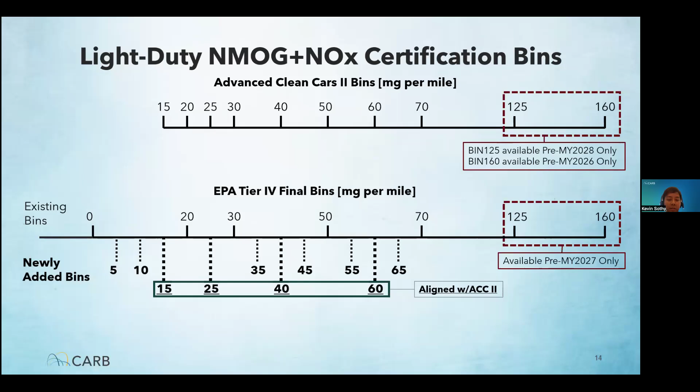ACC2 prioritizes real-world emission robustness, and our current bin structure will reduce variability between in-use emissions and certification values, as repeatability of emissions testing is more assured. Additionally, our current bin structure is more protective regarding OBD detection thresholds. For these reasons, we are not amending the certification bins for light-duty vehicles.

Since we are not making changes to our current Level 4 bin structure, this moves us to our next topic regarding the cleaner CARB provision. As we explained in the previous slide, EPA's Tier 4 light-duty program will have more certification bins than CARB's Level 4 light-duty program. On this slide, we will go over the complications the addition of these new bins creates with the cleaner CARB provision, which CARB is proposing to eliminate as part of these amendments.

For those not aware, the cleaner CARB provision prohibits manufacturers from certifying vehicles in California at a dirtier emission bin than they certify under EPA. For example, if a vehicle certifies to 35 milligrams per mile for EPA, under the cleaner CARB provision, the same vehicle must certify in California to 35 milligrams per mile or lower.

Since we are not changing the current Level 4 bin structure—sorry, I will speak slower for the translation—since we are not changing the current Level 4 bin structure, this means California will not offer a bin at 35 milligrams per mile, and manufacturers cannot certify to 40 milligrams per mile in California under this provision.

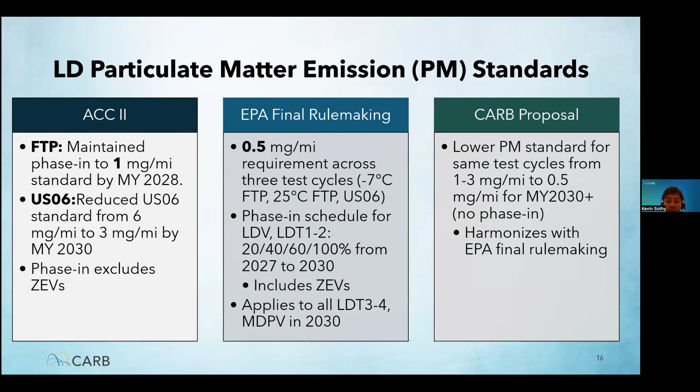CARB proposes to harmonize with EPA light-duty PM standards and lower our standard for all test cycles to 0.5 milligrams per mile for model year 2030 and beyond. As EPA standards will be fully phased in at this time, there will not be a phase-in for California standards. This concludes our topics for light-duty vehicle standards.

We are now moving to the next part of our criteria pollutant standards, which are on medium-duty chassis certified medium-duty vehicles. Similar to light-duty, manufacturers are required to meet a fleet average standard for their medium-duty vehicle fleet for each model year. On this slide, we will go over the medium-duty vehicle, or MDV, NMOG plus NOx fleet average standards for ACC2 and EPA Tier 4, then our proposed changes.

For ACC2, we adopted lower NMOG plus NOx fleet average standards, reducing the Class 2B standards to 150 milligrams per mile and the Class 3 standards to 175 milligrams per mile by model year 2030. The California standards exclude ZEV sales from being counted in the fleet average.

For EPA's Tier 4 rulemaking, they finalized lower NMOG plus NOx fleet average standards and set a combined standard for Class 2B and 3 medium-duty vehicles. The federal standards would reduce to 75 milligrams per mile by model year 2033, and the federal fleet average allows ZEV sales to be counted. Additionally, under EPA, all medium-duty vehicles that have a gross combined weight rating greater than 22,000 pounds can be chassis certified or engine certified.

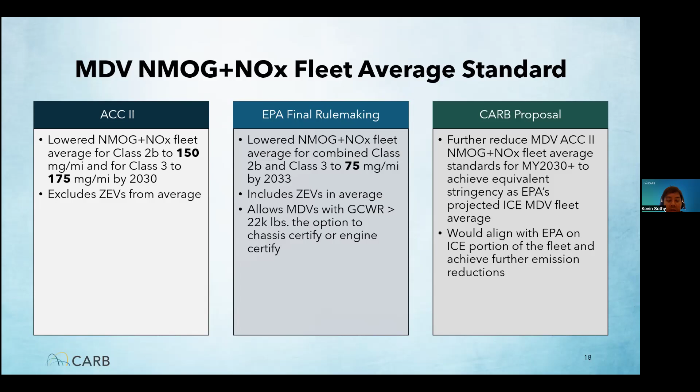On this graph, we will go over our current ACC2 standards and proposed standards for the medium-duty fleet average. The x-axis shows the model year in which the standard applies, and the y-axis shows the NMOG plus NOx emission standard in milligrams per mile. The current ACC2 standards are shown in solid lines for Class 2B and 3 vehicles. The standards reduce from model year 2027 to model year 2030 and remain constant after model year 2030.

We are proposing to replace our current separate standards for model year 2030 with combined standards, as shown here in the dashed lines. The proposed standards would be further reduced in the later model years. The proposed standards will continue to be an ICE-only fleet average for both medium-duty classes, and the standard would reduce from model year 2030 to model year 2032, with the standard at 130 milligrams per mile and remaining constant afterwards. This ensures the California standards are equivalent to EPA standards and achieves further emissions reductions in California.

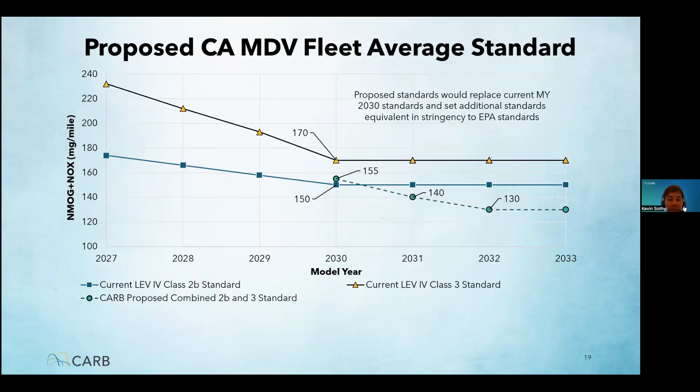We are seeking input on whether model year 2030 should remain as separate or combined standards. Now that we have gone over the medium-duty NMOG plus NOx fleet average standard, we will now go over the medium-duty NMOG plus NOx certification bins, which manufacturers use to comply with the medium-duty fleet average standard.

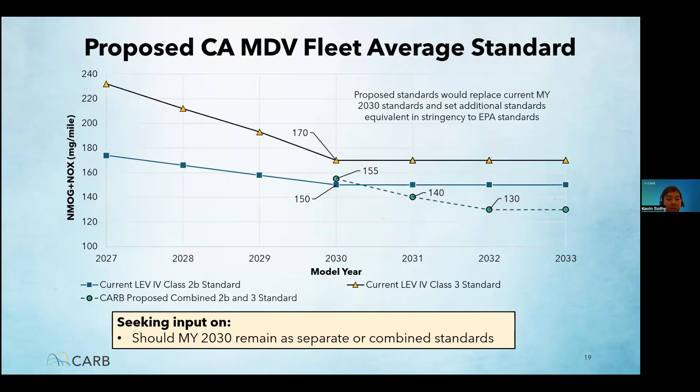On this slide, we will show a comparison of our current ACC2 NMOG plus NOx certification bins and EPA's Tier 4 certification bins. In California, our current ACC2 requirement is shown on the top diagram. We have separate certification bin standards for Class 2B and 3 vehicles. The highest emitting bins, shown by the dashed lines, are only available until model year 2028.

In the bottom diagram is EPA's Tier 4 certification bin standards. The highest emitting bins in EPA's program, shown in dashed lines, are no longer available in Tier 4, and both Class 2B and 3 vehicles have the same certification bin standards. Although EPA offers more bins, both EPA and CARB offer similar bin structure from 75 to 170 milligrams per mile, with EPA offering more bins under 75 milligrams per mile.

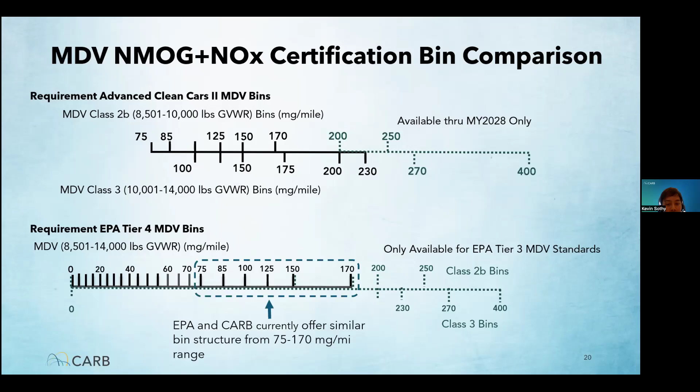Since EPA has a different bin structure from CARB, we are proposing to make changes to better align the two programs, as we will show in the next slide.

On this slide, we will go over proposed medium-duty certification bins that align with EPA, from the bin range of 75 to 170 milligrams per mile for both medium-duty classes. These are all the bins we currently have under ACC2.

Our current regulations phase out the highest emitting bins, ranging from 200 to 400 milligrams per mile, after model year 2028. Our proposal will continue to phase out the remaining higher emitting bins, ranging from 175 to 230 milligrams per mile, after model year 2029.

The proposal will simplify the current bin structure, requiring all medium-duty vehicles to certify to the same bin shown here, from 75 to 170 milligrams per mile for model year 2030 and beyond. This will align with EPA's bin structure and remove the highest emitting bins. We are seeking input on whether CARB should add a bin lower than 75 milligrams per mile.

This concludes our changes to the NMOG plus NOx certification standards for medium-duty vehicles. We will now move to the particulate matter standards for medium-duty.

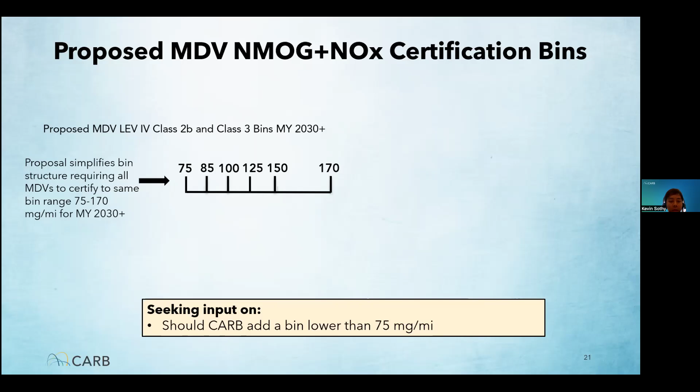This slide will cover our medium-duty vehicle PM standard proposal. Under ACC2, medium-duty vehicles are required to meet a PM standard on the FTP between 8 to 10 milligrams per mile and 5 to 8 milligrams per mile on their aggressive driving cycles. The PM standard varies depending on the medium-duty class and test cycle.

In EPA's Tier 4 rulemaking, they finalized a more stringent PM standard of 0.5 milligrams per mile that phases in from model year 2027 to model year 2031. This standard applies to all medium-duty vehicles on both the FTP and US06 test cycle, as well as for the new cold temperature test.

Since EPA's PM standard is more stringent than California's standard, CARB's proposal is to reduce the current medium-duty vehicle PM standard to 0.5 milligrams per mile for both the FTP and US06 standards, starting model year 2031. EPA's PM standard should be fully phased in by model year 2031, so there will not be a phase-in for CARB. This ensures equivalent stringency to EPA and achieves further PM reductions in California.

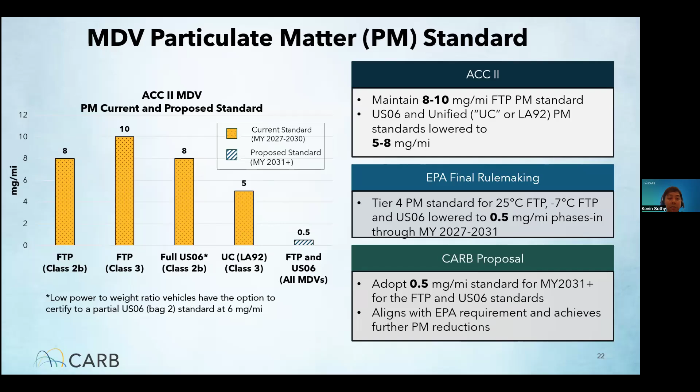We will now shift from the PM standard proposal to a medium-duty test procedure change. This slide will go over CARB's US06 test cycle proposal for medium-duty vehicles.

Current ACC2 regulations require manufacturers to certify to the full US06 test cycle for Class 2B, and allow low power-to-weight ratio Class 2B vehicles the option to certify to a partial US06. Class 3 vehicles have the option to certify to the unified cycle. Both test cycles are high acceleration and high speed tests, with the US06 being the much more aggressive driving cycle. Both test cycles are designed to capture emissions representative of highway driving.

In EPA's Tier 4 program, they finalized a test procedure change that requires the full US06 test cycle requirement for both Class 2B and 3 medium-duty vehicles, that phases in from model year 2027 to model year 2031. EPA eliminated the option for manufacturers to certify to the less stringent partial US06 option for Class 2B and the UC test cycle requirement for Class 3 vehicles.

Since EPA's Tier 4 requirements differ from ACC2, CARB is proposing that all Class 2B and 3 vehicles certify to the US06 test cycle beginning with model year 2030, and allow manufacturers the option to certify to this requirement earlier if they choose. This aligns with EPA and simplifies the certification requirement for chassis certified medium-duty vehicles in California.

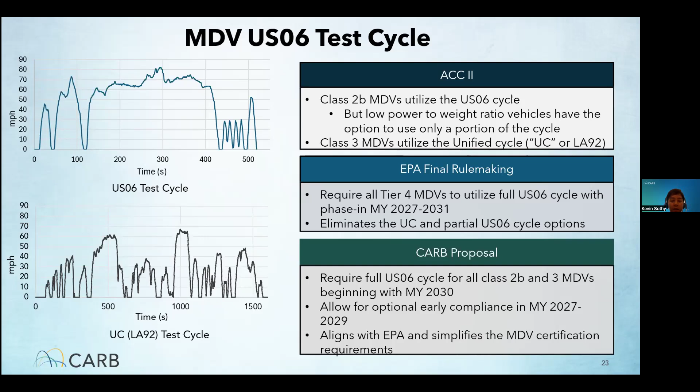Next, we will change topics to the medium-duty optional certification requirement. So this is on medium-duty optional engine certification.

Currently, ACC2 requires all medium-duty vehicles in Class 2B to chassis certify, and allows Class 3 diesel and incomplete gasoline vehicles the option to certify to the heavy-duty engine standards for criteria emissions.

Under EPA's Tier 4 rulemaking, they finalized modifications to the optional engine certification pathway that differ from ACC2. In EPA's program, medium-duty vehicles that have a combined weight rating greater than 22,000 pounds have the option to engine certify for criteria emissions. This allows all Class 2B and 3 medium-duty vehicles with a high combined weight rating the option to engine certify if they choose, which differs from the California program.

Although CARB and EPA's optional engine certification pathways will differ slightly, CARB is not proposing any changes to the current ACC2 regulations regarding optional engine certification, which applies only to Class 3 diesel and incomplete gasoline vehicles. Under both programs, manufacturers have the option to certify to a single certification pathway.

We will now move to the last topic for medium duty, which is about the medium duty in-use standard.

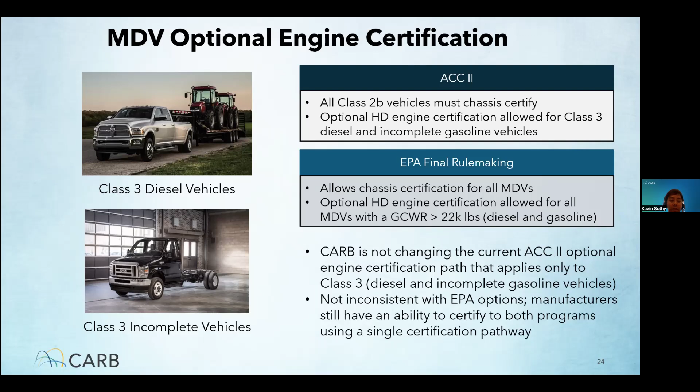On this slide, we will go over the medium duty moving average window in use standard, also known as the MAW in use standard. Current ACC2 regulations require chassis certified medium duty vehicles with a combined weight rating greater than 14,000 pounds to meet the MAW in use standards.

This requires manufacturers to perform PEMS emissions testing on road. Diesel vehicles under the MAW in use requirement must meet a 3-bin MAW standard, and gasoline vehicles must meet a 1-bin MAW standard starting model year 2027.

EPA finalized similar in-use requirements for Tier 4. In EPA's program, all chassis certified medium-duty vehicles with a combined weight rating greater than 22,000 pounds are required to comply with the MAW in use standard, similar to California. But EPA standards allow diesel vehicles the option to comply with either a 3-bin MAW standard or a 2-bin MAW standard, and EPA standards start model year 2031.

CARB is proposing to change our diesel standard from a 3-bin MAW standard to a 2-bin MAW standard starting model year 2027. CARB is not changing the 1-bin MAW standard for gasoline vehicles or the combined weight rating requirement currently established by ACC2. This will align our regulations with the upcoming proposed amendments to the heavy-duty omnibus standards.

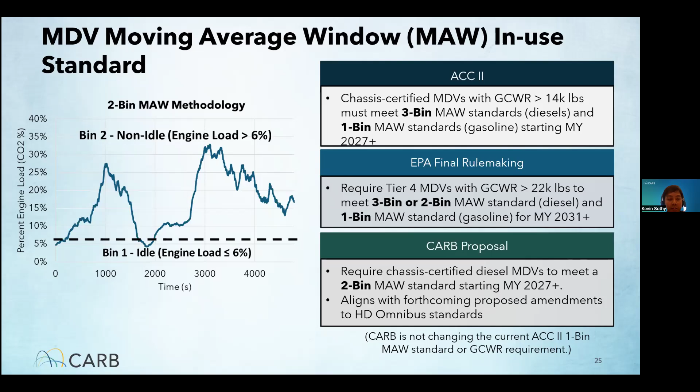This concludes the last topic for medium-duty exhaust emissions. We will now turn to the final topic on criteria pollutant standards, which is evaporative emissions standards.

EPA expanded an existing requirement for onboard refueling vapor recovery, also called ORVR, which involves capturing refueling emissions. The ORVR requirement was extended to remaining vehicle classes previously not covered. These newly included vehicle classes are incompletes, a type of vehicle without a truck bed typically sold to a vehicle upfitter, who then customizes the vehicle.

EPA's Clean Trucks plan added this requirement for heavy-duty incompletes by model year 2027, and their recent Tier 4 rule extended it to medium-duty incompletes by model year 2030. Our proposal is to align with EPA to apply ORVR for all incompletes starting model year 2030 to encompass EPA's 2 separate phase-ins. And to harmonize with these phase-ins, we plan to allow early certification so manufacturers can certify the same way in California as they would federally.

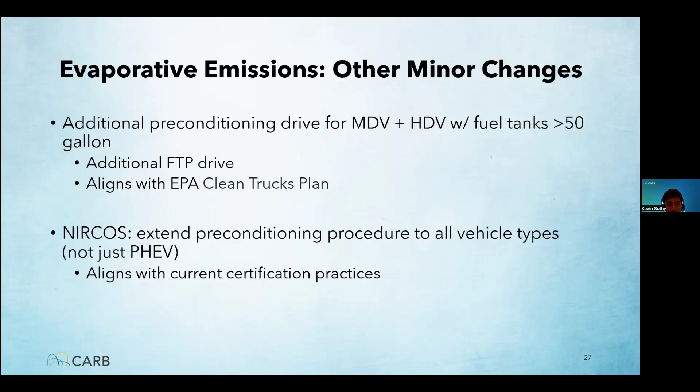We are also working on a variety of other minor cleanup changes in the evaporative emissions and ORVR emission procedures. The next slides for criteria pollutant standards will go over future workshop topics.

One topic that we don't have a proposal for today, but we'll discuss in a future workshop are potential amendments to the LEV IV altitude standards that we adopted back in 2022. We have heard from several manufacturers that meeting these standards on the prescribed timeline for certain test cycles is challenging or creates a substantial test burden. CARB is seeking emissions data and other relevant information specifying why the existing standards cannot be met to inform whether and what type of relief might be warranted.

This concludes our proposals and updates regarding the criteria pollutant standards for the LEV IV program. Next, we will move to the question and answer part for this section with Belinda Chen. Thank you.

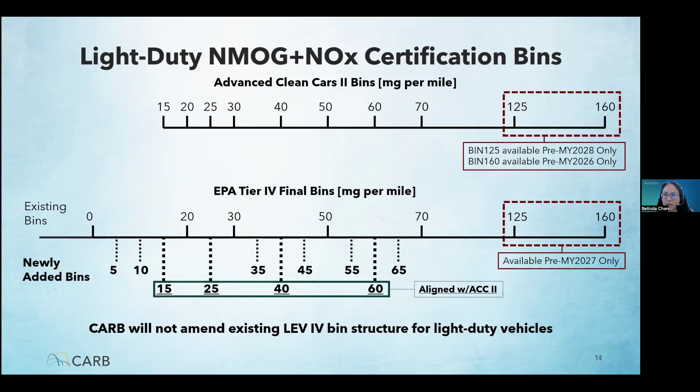All right. What? I don't think so. Sorry, are you talking with me? I don't know if my microphone is still on. Unfortunately, I cannot see it. That's okay, sorry, I was talking to a colleague, but we're definitely still working out some of the details, so I think we'll have to get back to you on this question.

My concern was only about a possibility, for example, that low volume test groups could progressively phase out from a manufacturer fleet while keeping the same value that this low volume test group brings for the customer, while keeping the same fleet average target for the manufacturer and progressively phasing out those cars, basically. Thank you so much.

And then there was a question in the chat about the cleaner car provision for medium duty vehicles. Currently that provision applies to both light duty and medium duty vehicles, and I guess the way we put it in our slide presentation may seem like it only applies to light duty vehicles, but the proposal would be to eliminate it for medium duty as well.

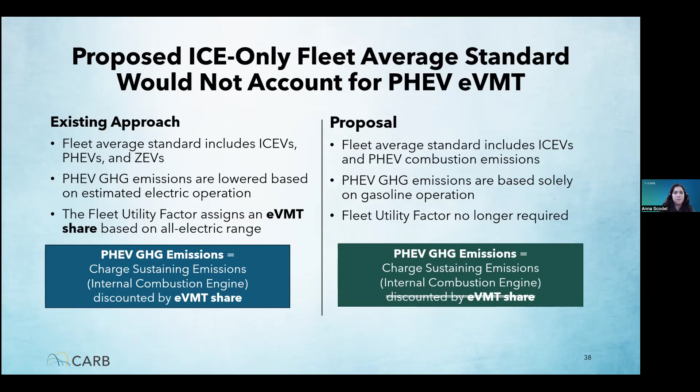As I mentioned, we're developing our greenhouse gas standard that eventually, by 2035, will only apply to plug-in hybrids. So in addition to seeking input on overall stringency, we're also specifically seeking input on future plug-in hybrid charge sustaining emissions rates and what an appropriate stringency might be for those vehicles.

Okay, so I've just covered the main components of our proposal. I'll now talk about a couple other provisions and flexibilities that we are proposing.

First, I want to talk about a concern we've heard from manufacturers about an ICE-only standard: what do we do about internal combustion engine emissions increases that might look like backsliding, but are really the result of a manufacturer having a dwindling number of ICE models as they expand their zero emission offerings?

In thinking through this issue, I want to clarify that our proposal is still to have separate car and truck footprint-based curves. So it's not a matter of whether the last-to-transition vehicles are smaller or larger, cars or trucks. The issue is if the remaining vehicles are biased towards the higher emitting variants above the standard, rather than having a balance of lower and higher emitting variants to meet the fleet average targets.

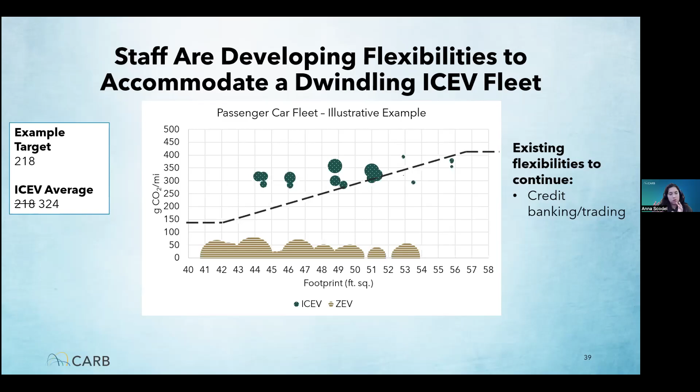Most notably, we're thinking about a mechanism to reward manufacturers that are truly ahead of the game on zero emission vehicles, by allowing them to transfer ZEVs that would have earned excess ZEV value in the ZEV regulation back into their ICE-only GHG fleet average.

So if we take a last look at this example, we see that if the manufacturer is able to count a certain subset of their zero-emission vehicles towards their greenhouse gas requirement, rather than their zero-emission vehicle regulation requirement, they are able to comply with this ICE-only fleet average standard. So this is something we're certainly seeking input on, as well as other ideas on how to ensure that manufacturers can manage a shrinking number of ICE vehicle test groups without sacrificing emissions reductions.

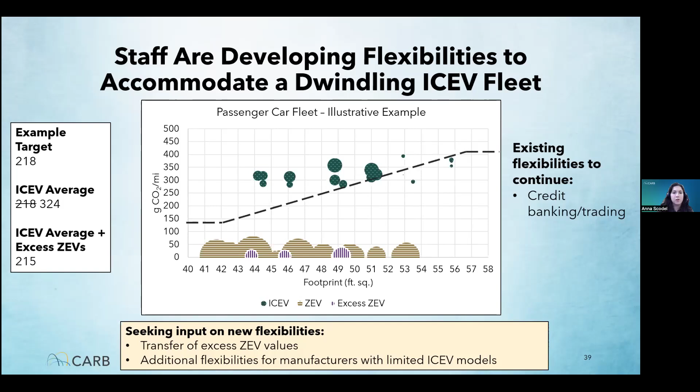Okay, touching now on another topic: the treatment of credit banks from the Advanced Clean Cars 1 program. As I mentioned above, in this proposal we're not talking about requiring manufacturers to newly develop technologies to meet the standards, but we still believe some lead time is appropriate to transition to an ICE-only fleet average. For that reason, we're proposing to update this stringency beginning in the 2030 model year.

We expect manufacturers that remain on track to meet the federal standards will very likely have fleets that would significantly overcomply with our flatline standards, especially as they comply with our ZEV regulation and introduce more zero-emission vehicles. This overcompliance could result in excessive credit banks for a lot of manufacturers heading into the 2030 program, and that makes it harder for us to establish a meaningful standard for California.

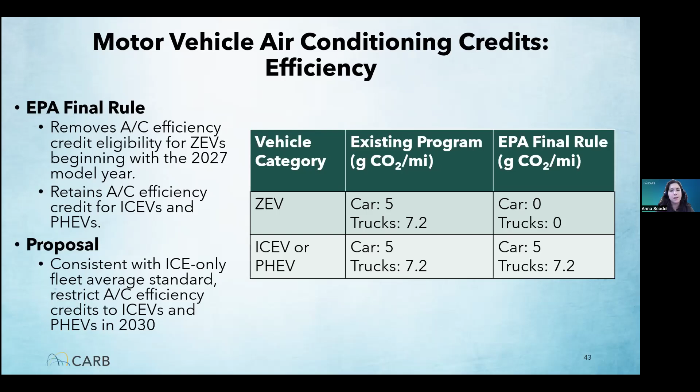Okay, and then the last piece of the proposal here is the definition of medium-duty passenger vehicles. These vehicles are subject to CARB and EPA's light-duty greenhouse gas standards. In their rulemaking, EPA expanded their definition of these vehicles to better capture some passenger vehicles that fall outside the existing definition. These modifications include increasing the weight threshold to include heavier vehicles, increasing the cargo area threshold, and adding a work factor threshold to better define these vehicles.

What this does is include more vehicles than under the current definition, meaning that some vehicles will be pulled out of EPA's medium duty greenhouse gas program and into the more stringent light duty program.

In their rulemaking, EPA stated that one of their goals here was to help address new passenger battery electric vehicles that might be heavy enough to fall outside the current medium-duty passenger vehicle definition, but really are passenger vehicles.

And we agree, and we're proposing to align with this expanded definition in 2030. But I want to mention that because we're proposing to exclude zero-emission vehicles from the light-duty fleet average, we expect the overall impact on the number of vehicles that would be newly subject to these standards to be relatively small.

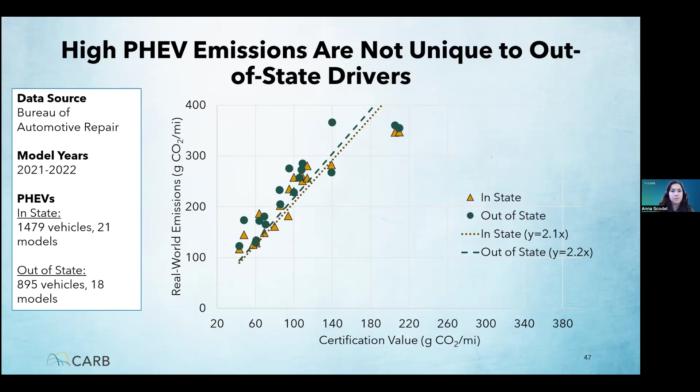One other notion we have heard to help explain these high plug-in hybrid emissions is that maybe the people who buy plug-in hybrids in California are doing so just to gain access to high occupancy vehicle or carpool lanes, and maybe they aren't really motivated to charge their cars.

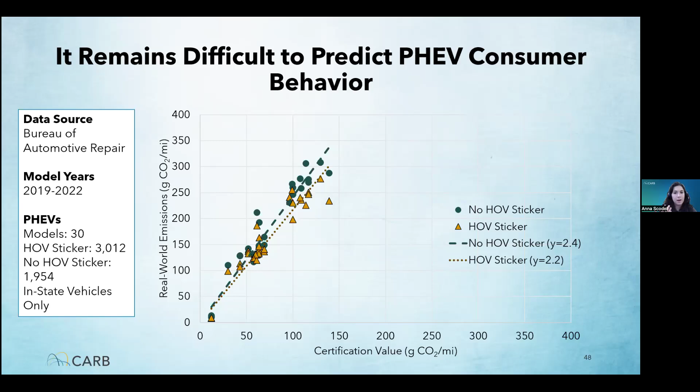So as I mentioned before, our proposed ICE-only greenhouse gas fleet average standard would be crediting plug-in hybrids based solely on their charge sustaining emissions. So we would no longer be estimating that EVMT share for compliance purposes, but we are continuing to assess these issues to quantify the benefits of our programs and think through any potential regulatory mechanisms to better reflect real-world emissions.

And so with that, we've talked through the greenhouse gas proposal, just concluded an update on some of that data analysis we've been doing on real world emissions, and we'll now open it up for Q&A.

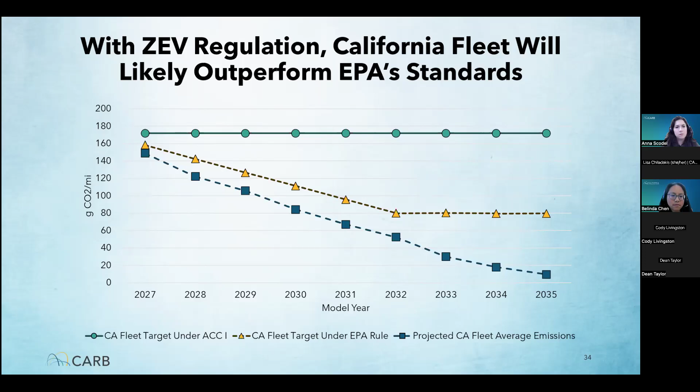Got it. And then on slides 37 and 38, you're not counting any of the electric miles. So am I understanding, if you had a plug-in hybrid 20, or a plug-in hybrid 50, or a plug-in hybrid 150, they're all, or even a regular hybrid that doesn't plug in, treated the same? Is that correct? Yes, that's correct. So no factoring in of other considerations like pack size and upstream battery mining or manufacturing emissions, anything like that?

Yeah, what we're looking at here for the ICE-only fleet average standard is just those tailpipe emissions. So whatever the plug-in hybrid's charge sustaining emissions are, regardless of the all-electric range, is what we would be using as the compliance value for the ICE-only fleet average standard.

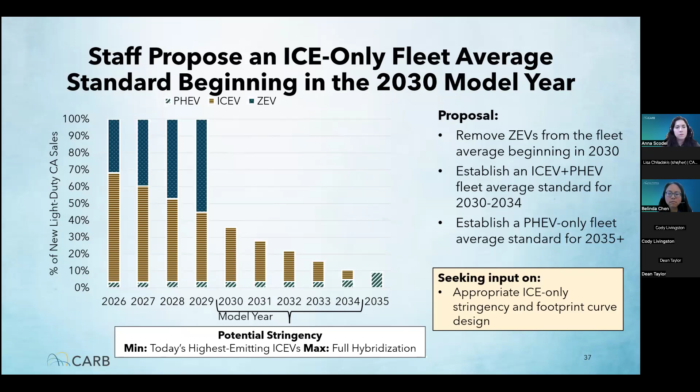And then if I'm hearing you right on slides 45 to 48, regarding all of this, there's no real proposal at this time. I mean, it may be this rulemaking or maybe a future rulemaking when you may do something, but there's no proposal really based on all of the data you're collecting.

Yeah, that's right. It's more of an update on some of the analysis we're doing. A big piece of that is for us to understand the emission benefits of our programs. While we're not proposing any design requirements on plug-in hybrids, and we're not looking at changing the plug-in hybrid provisions in the ZEV regulation, we certainly expect manufacturers to continue using plug-in hybrids as a compliance mechanism in both programs. So we want to make sure we continue to understand what the emissions are from those vehicles, so we're accurately understanding the benefits of our programs. So to directly answer your question, there's no proposal here, but it's something we're continuing to look into.

But slide 33 really is in some ways the proposal, because that deals with the whole issue of plug-in hybrids. Is that correct? Yes, I think 33 is the one where we have the side-by-side. So yes, the proposal here is that we're not looking to estimate the EVMT share for compliance with the ICE-only fleet average standard, but we do quantify the benefits of our regulations. We are continuing to investigate this more broadly as part of our programs, but the proposal for compliance purposes for the ICE-only fleet average standard would be just the charge sustaining emissions from plug-in hybrids, regardless of any of its other features.

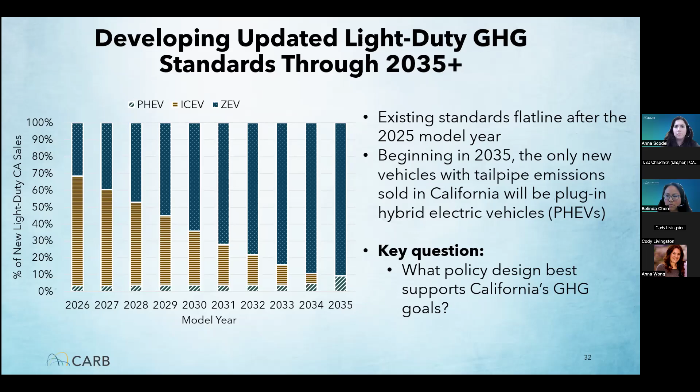I had two questions. First, in the analysis of plug-in hybrids' real-world benefit, did you incorporate just the default setting of cars? I've driven a plug-in hybrid that always starts in gas-powered mode, so in your considerations, what was the default setting when you start a car? Is that clear, the question? You're asking about the data we have and how we evaluated it? Yeah, if that was one of the situations you analyzed when looking at real world plug-in hybrid emissions. Yeah, so the data we get is cumulative over the life of the vehicle. I don't know specifically which models may have that default setting where the gas engine only turns on, and I don't know exactly if that's a setting the driver chooses or the factory setting. So we didn't look at the data at that level of detail to be able to parse it out. Okay, thank you.

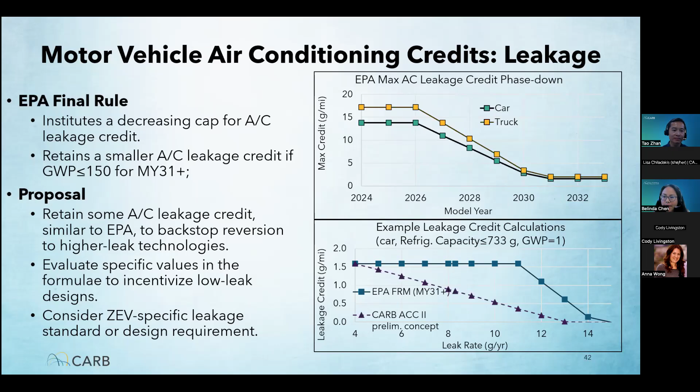Okay, next question is from Jackie Yeager. Any changes under consideration for medium duty greenhouse gas standards? Those are handled by another group at CARB, and I think they're contemplating that as well as the phase 3 updates. So they will not be part of this rulemaking.

And then maybe more of a comment from John Yarrow: plug-in hybrid owners do not make full use of the fully charged battery, i.e. they don't maintain a fully charged battery, but rely on the mild hybrid capability. So the fully charged battery electric range isn't utilized.

And then the last question is from Sashi Venati: a request, can the data behind slides 46, 47, and 48, the plug-in hybrid real world emission data, be made available for OEMs for review and further analysis? So we do get this data from the Bureau of Automotive Repair, so we would have to check with them before we release it, but that's a request that we can make.

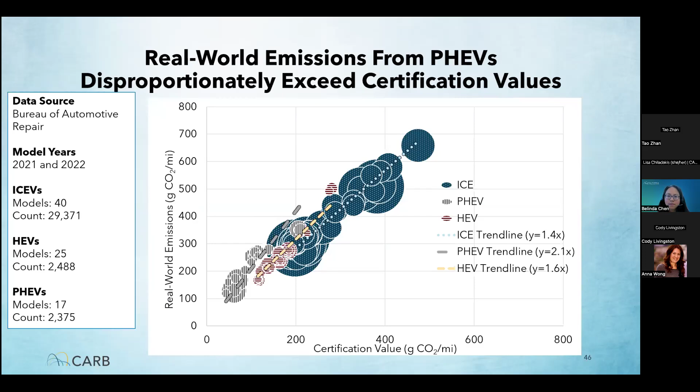Thanks, Belinda. We'll now turn to the last topic for the day, our zero emission vehicle assurance measures.

Joyce Wong on my staff is going to cover our ZEV assurance measure, which is focused on a consumer-facing label. And then Ryan Hart will cover interoperability and touch on updates on implementation of the battery label and data standardization requirements that were adopted under Advanced Clean Cars 2.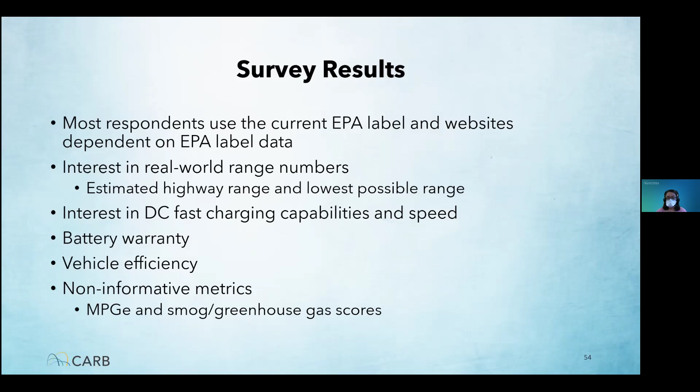In tandem with our proposal to add new range and charging metrics to the California label, we are looking into test methods to obtain and present more meaningful range and charge speed data. For range, we are supportive of changes to SAE J1634 that would allow high speed range to be calculated from data that is currently collected from testing. High speed range better reflects real world conditions, as people often drive at speeds greater than 60 miles per hour than in the highway fuel economy tests. Also, range at high speed is generally more worst case, which is something we know consumers want to see.

For charging, we are proposing to use SAE J2953/4 to collect charging speeds. The current 0 to 100% state of charge at level 2 is not reflective of real world usage. Currently, we are proposing to require manufacturers to use the J2953/4 procedures to collect and report both AC and DC fast charging data in a consistent and standardized manner. This could then be used to create a meaningful metric, such as miles recovered from 10 minutes of DC fast charging and miles recovered from 1 hour of AC charging.

The committee is taking a realistic approach to ensure consistent starting conditions for the charging event and to collect data that could be used in a couple of different ways to present results to consumers for comparison shopping. While we are still getting up to speed with the committee and ensuring it will meet our needs, it certainly appears to be on the right track. If any OEMs have data, information, or alternatives regarding charge rate or range test methods, we will consider it.

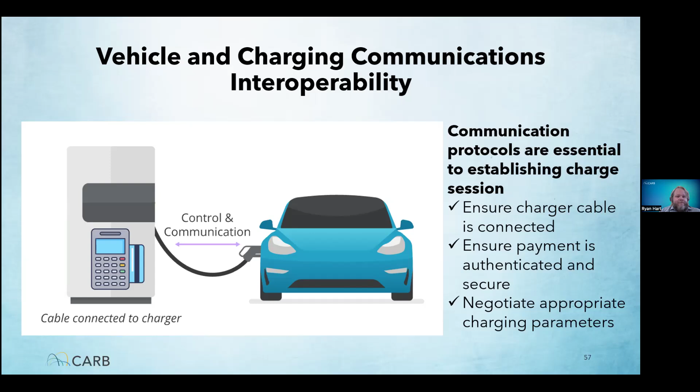Vehicle manufacturers, charger manufacturers, and charging service providers are all well aware of charging session failures. In the absence of required standardization, large in-person testing events have helped bridge the gap to help each of these parties better understand root causes of charging failures. At one of those testing events...

In one-on-one meetings with CARB, manufacturers have confirmed these findings with real-world data that show that the vast majority of failures occur while a charging session is being established prior to power flowing. This points to a need for standardization and consistent implementation of these communication protocols.

According to one of the few detailed studies published, payment and payment authentication represents a significant portion of failures when establishing a charging session. Failure during the payment authorization can be due to many different factors, including system timeouts, human error, and issues with payment authentication. If payment authorization is not completed, it typically results in the consumer being unable to charge.

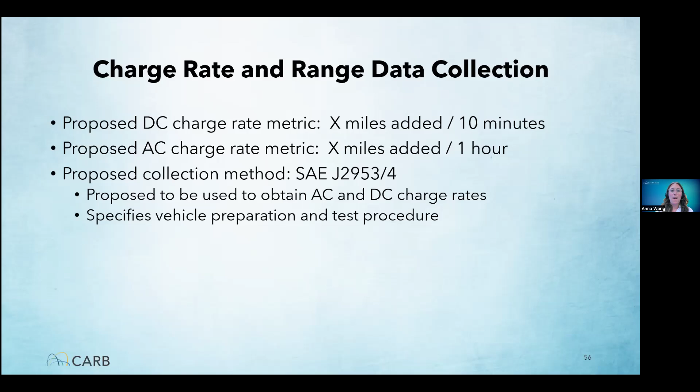I have a question about adapter standards. As we continue the transition to the North American charging standard, we know adapter safety and performance are going to be increasingly critical for the consumer experience. EVgo has consistently supported the UL 2252 certification requirements for adapters to ensure safety and reliability. So I wanted to ask staff to share any insights or thoughts on CARB's plans to update or strengthen adapter regulations as part of CARB revisiting the Advanced Clean Cars 2 regulation.

Thanks for that comment. There's a lot in your question, so I'm trying to make sure to answer what you're really trying to say. For the adapter UL standard, if I remember the regulation correctly — and any of my staff can correct me — I believe a specific UL standard is not named, but it has to apply to applicable UL standards. It's a good comment, and we'll take it under consideration as we think about any updates to further clarify what could be met with those adapters. So thanks for that comment, I think we would definitely be considering it during the rulemaking.